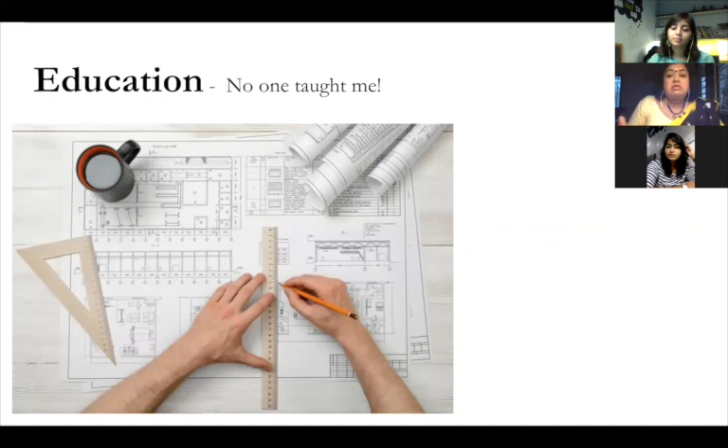One reason is education. Like one of you shared during the networking, nobody taught us. We are supposed to do things related to sustainability in college - maybe an assignment, possibly some detailing, maybe some material we've read in different places - but there is nobody who teaches us why, what it is, and how to go about it.

The second is the perception we have of the kacha and the pakka house, created by the community. If you are economically and socially poor, you will live in a mud house with a thatched roof - that's a kacha house - and then there's a pakka house. This was also shaped by the story of the three pigs and the wolf - if there was a straw house, the wolf could blow it down, if there was a wooden house, he could burn it. Something built with alternative materials could be destroyed, but a brick and mortar building stands. That changed how we started looking at construction, and it influenced young brains.

And then, of course, the media and the corporations have played a huge, long-standing role.

Everything that is, you have all these Ambuja cement ads showing one muscled man, and steel rods advertised behind buses and on large placards. You believe that's the only thing that's really strong, and anything else is weak. In spite of centuries of construction techniques that had nothing to do with cement or steel, our belief now, thanks to media, is that nothing is stronger than a pillar, or what people call a column. This is deliberate ignorance created by media so people don't approach anything else but materials that are great for corporations themselves.

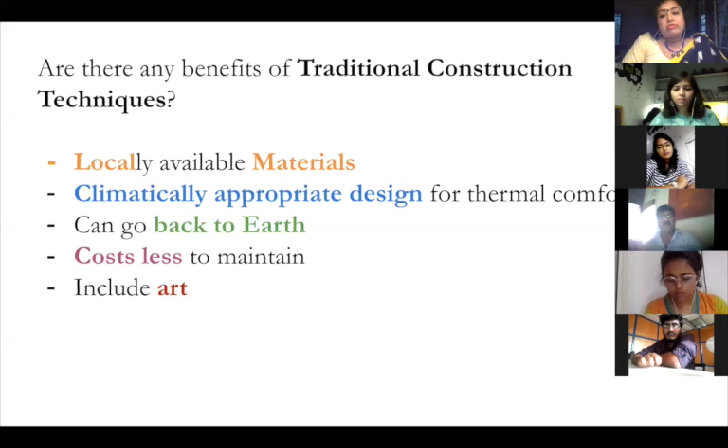So one thing we know for sure, that as artists and architects and designers, we are already artistic, so we already have the art bit of it. But it's the other references that somewhere we're missing that we might want to tie back in. And sustainability is this conversation and understanding of how to sustain a practice in building shelters. Very simple.

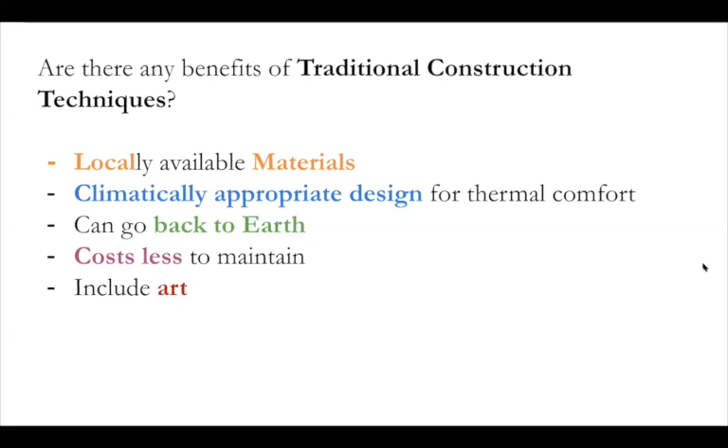So I'm going to revisit some of the slides from the previous workshop, so that for those of you who joined today for the first time - these are just a few of them.

One is that the architecture and construction industry together accounts for 36% of global energy use and 39% of energy-related carbon dioxide emissions that are annually affecting the climate today. That's a lot. And in India alone, the construction industry generates about 10 to 12 million tons of waste annually - that's a huge amount of waste that cannot go back to the environment in a way that allows the environment to be restored.

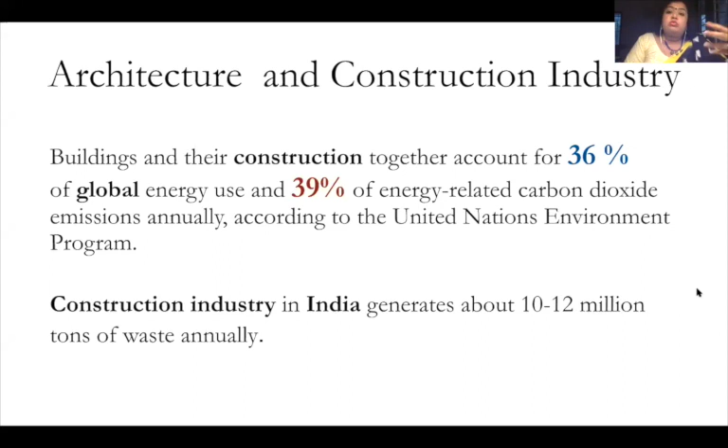There's a government, and in spite of that, the government of India says that the construction industry contributes to 9% of the GDP. And it employs 44 million workers, because of which we're the second largest employer as an industry in this country. It also helps people move up the skill ladder, to improve their income, to be able to have and avail more and better.

In a country with such a huge population, this is not an industry that can sit down and say, oh, we don't want to do this. This is where we become extremely responsible. It is our responsibility as leaders in this community to bring about this change in a way that people also benefit a whole lot.

So of course, there's a lot of necessity for innovations in the construction industry, and sustainable solutions are sought, and that is why you're here today, to learn about them.

To us, this is what sustainable design means, irrespective of the construction industry or not, whatever it is that you are doing, whatever it is that you're making, however it is that you live. This is a very simple thumb rule that you can go by. We've called it RALIS. I could have called it RAILS as well, but we've called it RALIS.

One is to rethink how much we need and why we really need it. Number two is real, genuine climate sensitiveness in understanding the climate, how it works, and how it affects the structures and vice versa.

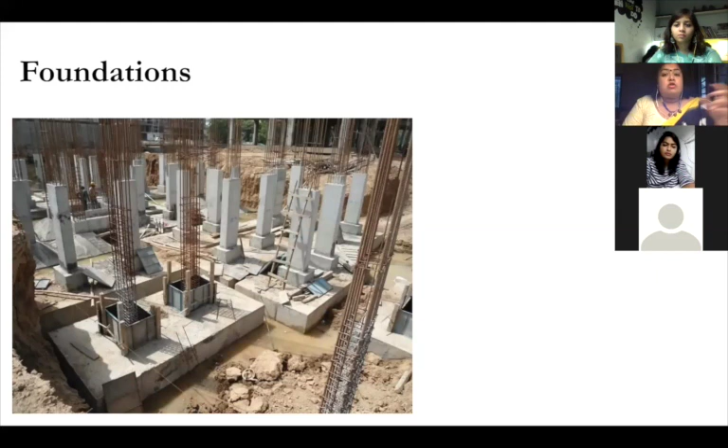When I came to South India, I discovered, because I'm otherwise from Gujarat, that you have these stone foundations, because stone is very easily locally available. So in South India, we do stone foundations and nothing stronger than that.

It's beautiful. This is again a very simple example of what you can do to have an alternative to just concrete, because steel and cement contribute to a huge amount of emissions to the environment, so they need to be re-looked at as materials for building.

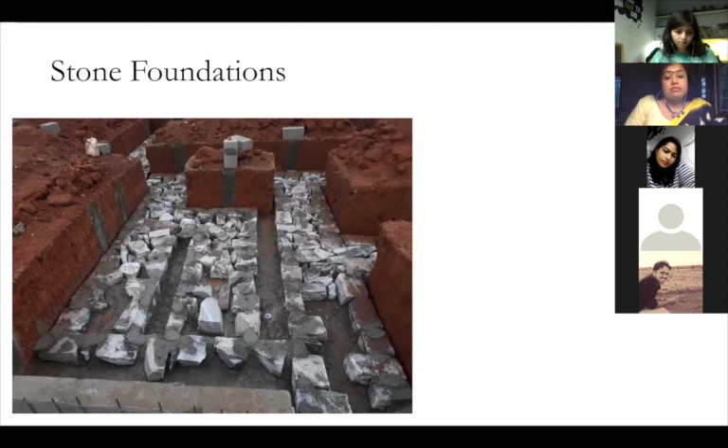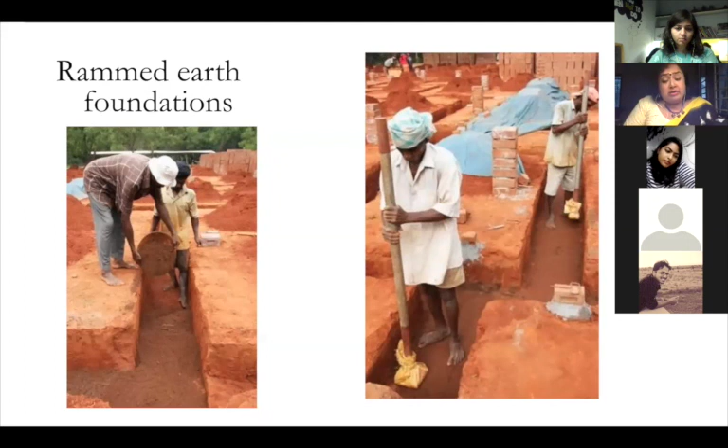You have rammed earth foundations. Very simple. Those of you who have been to Auroville have already got introduced to this idea. Very simply done. Used to be a big practice once upon a time, has got redundant over time, can be brought back. The arch foundations, right?

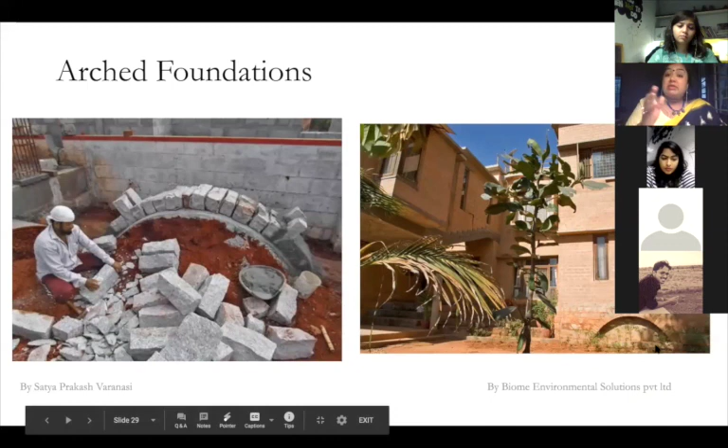This is a beautiful arch foundation example by Satyaprakash Varanasi's office, and this one from Chitra Vishwanath's office Biome Environmental Solutions Private Limited. This is a great way to reduce the amount of material that goes into making the foundation as well. Because stone is already a material, but then how much do you want to use of it? How do you minimize the material? It takes a little different design thinking when you use this kind of technique, but there is still a possibility of it.

Fly ash bricks, doing load-bearing foundations with the kind of bricks that are available locally. In Pune and thereabouts, Deepak was asking this question. There are a lot of fly ash bricks available because Pune basically consumes thermal power, and because it consumes thermal power, fly ash being a byproduct that is generated out of it. They also have a lot of pharmaceutical industries, which have a lot of calcium carbonate based materials. You can combine this and make beautiful bricks, which utilizes the waste for foundations.

There's another technique called soling, and you can do soling over soft soil. There are thousands of techniques, and I do not know where to even begin or end. So I've only touched upon some basics that I have been introduced to, that I have experienced and executed myself.

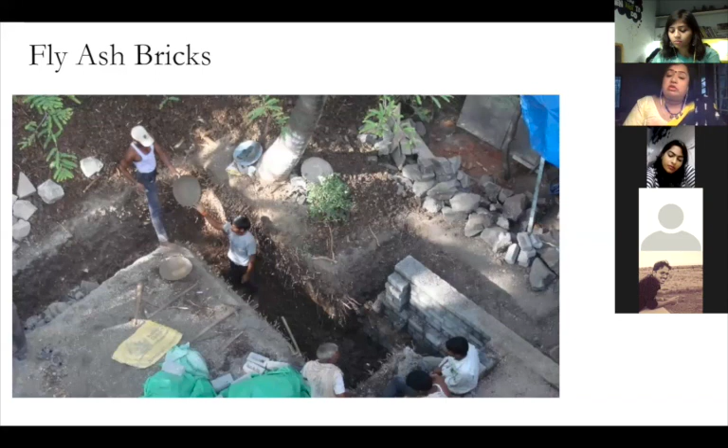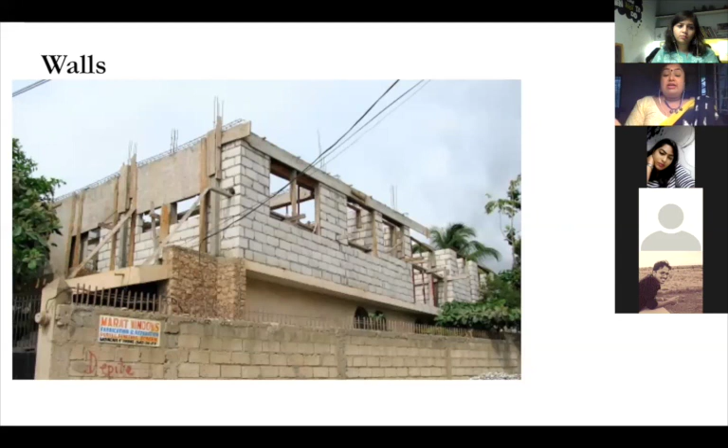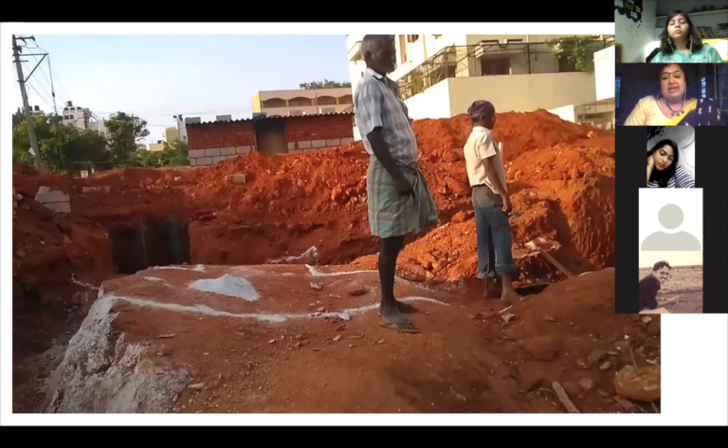What you do with this beautiful soil that you excavate anyway, you can make these SMB blocks, these stabilized mud blocks with them. This is the technique that the scientists of Karnataka in the Mysore region came up with, and it has been so popular in the past couple of decades or more. It needs a specific kind of soil structure, a very sandy soil, and it becomes easy to do in the Bangalore region because the soil here is naturally very sandy in nature.

What is a beautiful part of doing alternative construction techniques is also this, that it automatically makes you very sensitive to what is in the environment. Automatically.

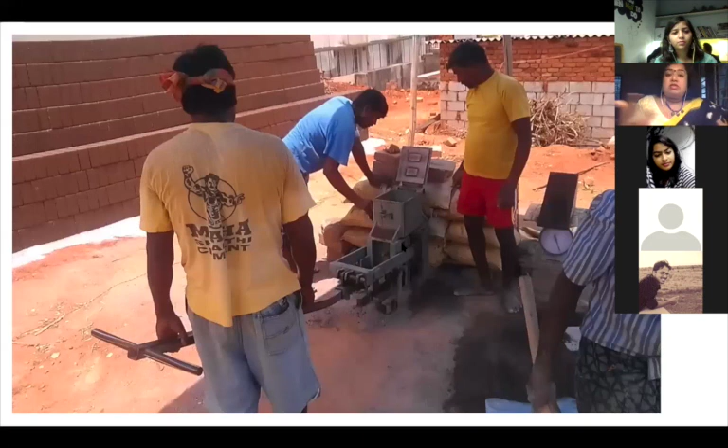We also call them mud blocks, stabilized mud blocks, CSEB blocks. There are several names given to them, but at the end of the day, they're made with soil, made with mud. And it's very easy to make them.

You'll end up seeing, I'm sorry.

And that's what the walls end up looking and being like. It's very easy to incorporate this back into the system, because the workers, the laborers, for at least a couple of generations have already got used to the old technology, the old techniques of building walls or construction. So it's very easy for them to move from regular bricks or regular materials to the mud block, and it's an easier transition. You will see that more of us are using these mud blocks because it is very easy for the laborers to handle them as well.

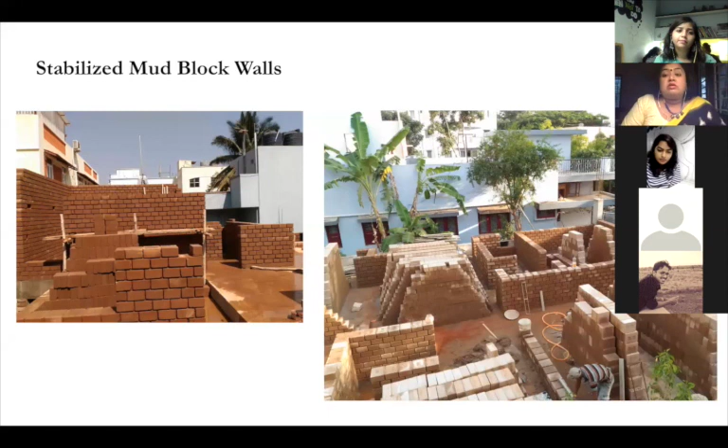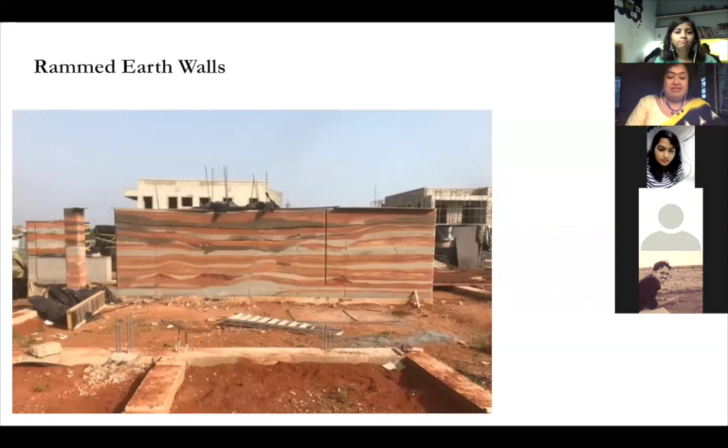And then there is rammed earth, of course, and you can do beautiful things with rammed earth. How amazing that it ends up looking as well, and it can be sculptural by itself. There's a site where you just need two pieces of planks or shuttering, just like you need for concrete, and you can ram the earth into place.

This is a mix of earth, mix of soil, and there's a little—in Bangalore, we use a lot of dust. You can also use sand and a small proportion of cement or lime to give it some sort of stability. It kind of acts like concrete, so it makes it very easy and very stable.

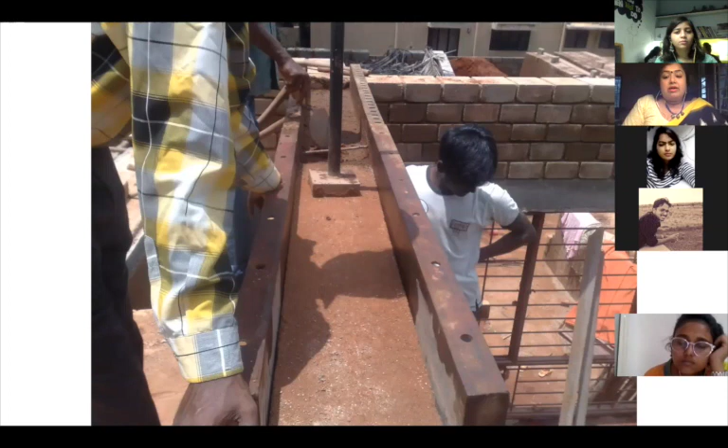In fact, they end up being pretty strong. It's very difficult to break or cut into these walls. Most of the electricians who have to cut into them for conduiting will complain. It is easier to cut into your regular bricks. The strength of these mud blocks is far higher than your regular red bricks that you manufacture, red table mold bricks that we talk about.

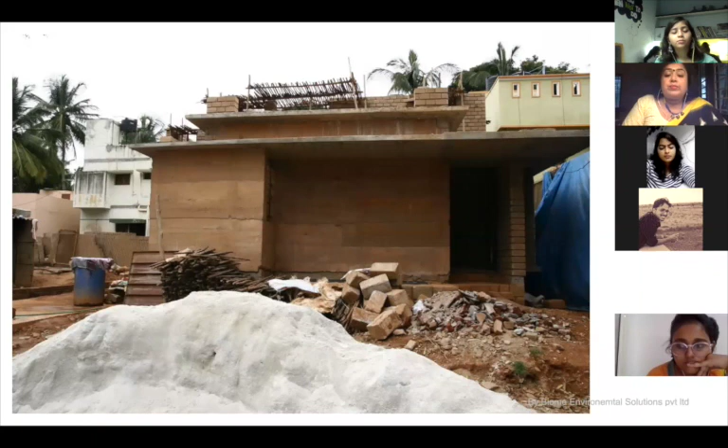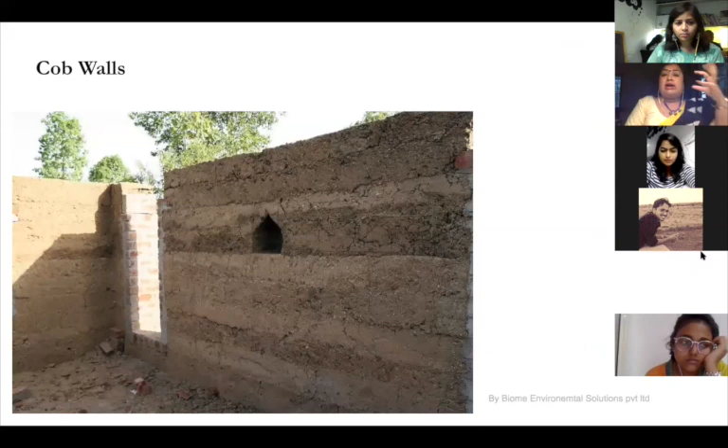And then there's cob walls. Cob wall is one of the most ancient techniques in most of the region of Central Asia, Central India. This is a very clay soil that allows you to work and mold the soil a lot. You add a little gravel, you add a little straw to it, and that makes it very malleable. Give it a little mold if you wish to, or just use your hands to give it a shape, and you can create very beautiful sculptural structures out of it. Traditionally, there have been 2-3 story buildings also created with cob, so you don't have to really limit yourself.

In this case, this is a cob flooring.

And then there is adobe bricks. Adobe bricks, again, these are not necessarily your mud blocks. The mud blocks are compressed in nature, compressed to give them a certain kind of density that makes them very strong. But these adobe bricks were a traditional method of doing it. I'm sorry if the rain is disturbing, it is pouring right now.

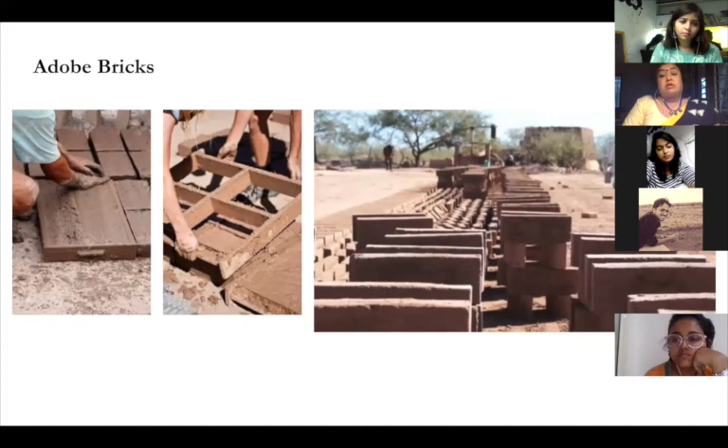The adobe bricks bring in a little straw, again a little gravel, just like cob. It works like how cob works, but you give them into small parts, because it's very easy for you to work with them. This technique is, again, very highly used in the central part of our country, and in Africa as well.

Very easy. In the east region of the country, you will see this technique of wattle and daub, as we call it. There's a lot of bamboo that's very easily available. Because it is raining so much, the walls need to breathe a lot. It needs to keep the walls aerated so that it reduces the amount of humidity and makes it easier to breathe. The wattle and daub is a superb technique to get that working for you. It's a very innovative style that a lot of architects have been able to incorporate as well. So if you're working in the east of the country, where the materials are easily available and there is less termite infestation, it is very easy to use these techniques.

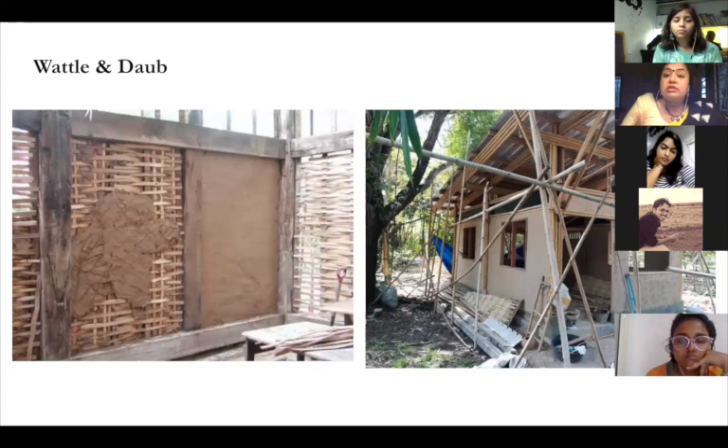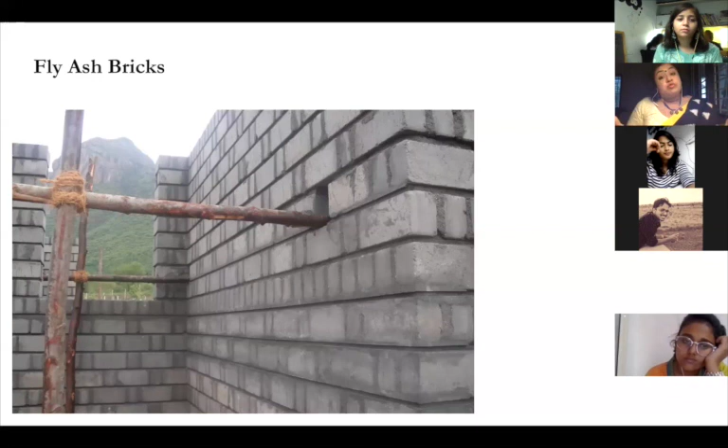And then, like I mentioned earlier, there is fly ash bricks. These are manufactured in parts of the country where you have thermal power stations. If you have thermal power stations and a lot of fly ash, it makes common sense to make a brick out of it, because otherwise that carbon left in the environment is very difficult, very difficult on the respiratory systems of human beings. So what you can do is build buildings with it, because that is our way of paying back our debt to the environment. They're absorbing that material.

In a technique called rat trap bond, also famously known as RTB, you use a lot less material—only two-thirds of the material. You save a lot more material, allow for the walls to also be insulated in the process, and the buildings can look very nice. You don't necessarily have to do something else on it.

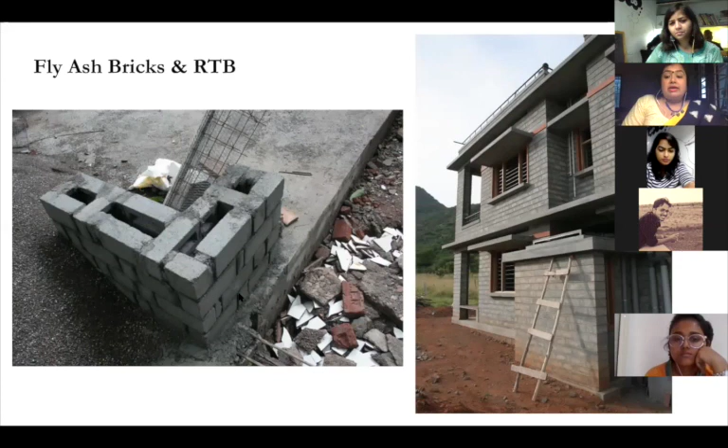In case you're even having to use your regular table mold brick, the reason we are not really encouraging the use of table mold brick is only for one reason. Especially where we are in this Karnataka region, farm owners sell their farmland because it is highly poisoned with chemicals and pesticides that are corporation fed, and the soil is not generating anymore. These non-generative lands are sold away to brick making factories, or rented out to them, so that they can make bricks with the soil. The top soil, which otherwise has a good amount of what we call organic matter that allows food to grow, is only the first 9 to 10 or 12 inches of soil. That is already taken away, and then the bricks are made with them.

The bricks are burnt, and all the organic matter is burnt out too. The bricks are not of great quality because the soil here is not very clean in nature. So why even use it? But if you do have to use it, rat trap bond is a great technique because it helps minimize material. It depends on where, because if your houses are in close proximity, you don't want to use that, because just as air is a great insulator of heat, it is also a great conductor of noise. So you want to be sensitive about that.

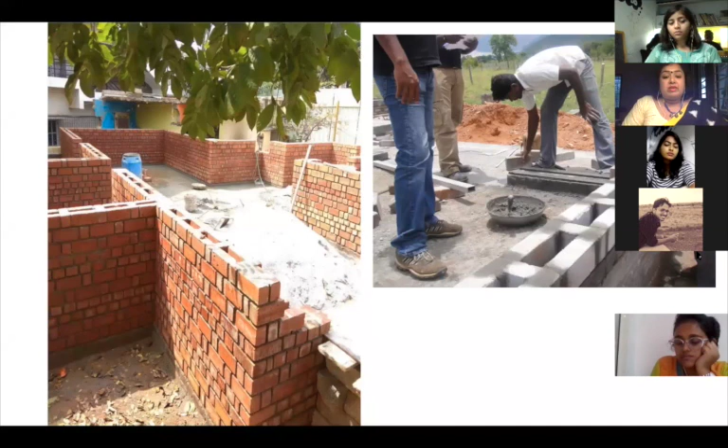And that's what our rat trap bond house, that we have, Maitri Shankar would relate to. It is her neighbor, and this is what it can end up looking like.

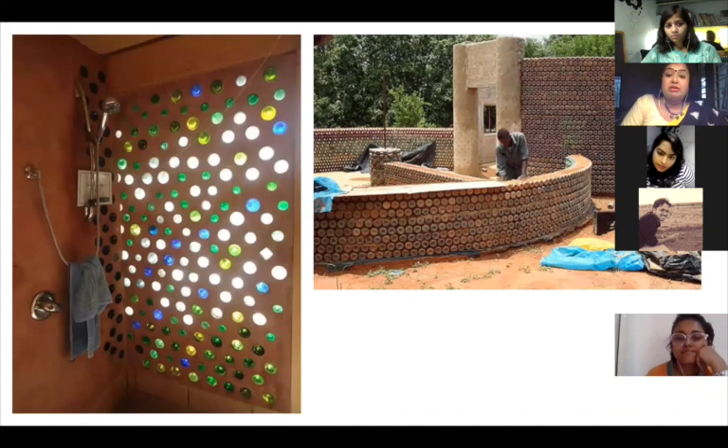And then there are bottle walls. There's so much waste out there, especially bottles, because we're partying so much. There are all these bottles, and you can create bottle walls and bring a lot of drama and fun with them. It's so exciting to see light coming through in such a magical way. There are regions in Maharashtra where plastic water bottles are stuffed with earth or other waste material and used for building, and it's beautifully done.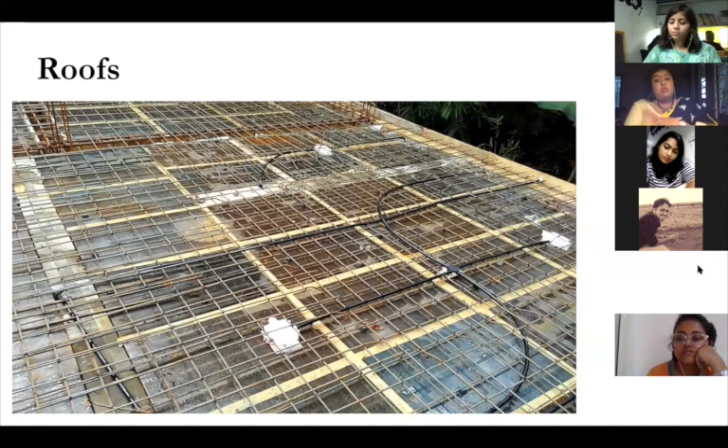So the question is, do we really need all of this? Is this how it's meant to be? Is there another way? We'd like to show you the different kinds of roofs you can really play with. There's, of course, the filler slab.

The filler slab allows you to halve the amount of steel, and also brings in insulation because the material is hollow. The hourdi, a tile manufactured in this part of the country, in Kerala and Karnataka, is a beautiful invention that allows you to do a filler slab very conveniently. In other parts of the country, I've found it's not always an available material, so you can always use another alternative.

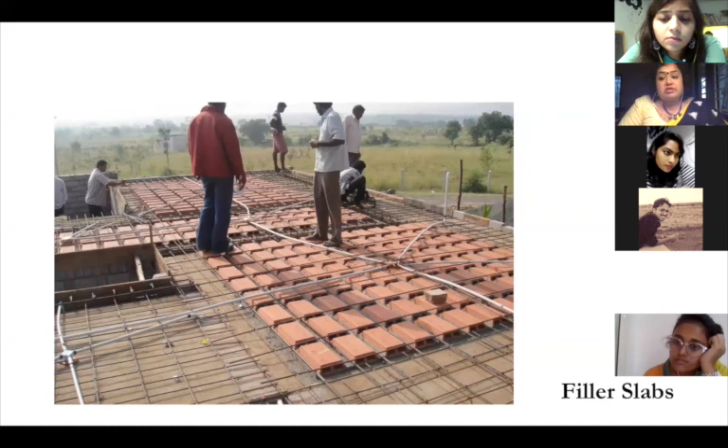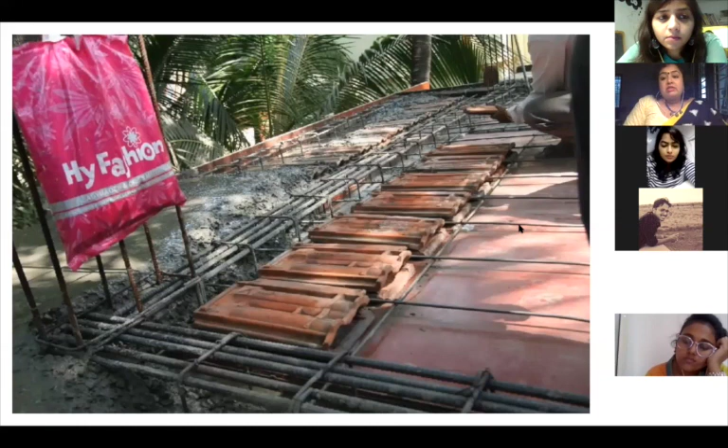I'd like to show you what. In the buildings we did in Pune, we went to our neighbors and found they had all these Mangalore tiles that were wasted and they didn't want to use anymore, because they had a sloped roof, but these tiles were not the new standard size, and the old ones were not usable anymore. So sandwiching them and using them, a technique developed by Laurie Baker years ago, is a beautiful system to minimize the amount of concrete and steel, and is another way to do a filler slab. You can bring design and variation into it.

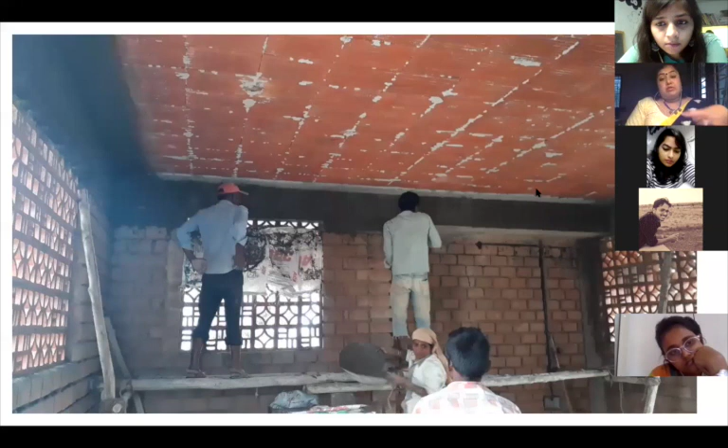And that's how it could look from the bottom. There's something new, something different. The finished version ends up looking and feeling like that. You can, of course, paint it to a color you wish, but you can also leave it naturally the way it is.

Bringing terracotta material into it, there are so many architects doing fabulous work right now, playing with these materials and creating some magic with them. You can bring in waste tiles and incorporate all of that to again help minimize the amount of steel and concrete that goes into a slab.

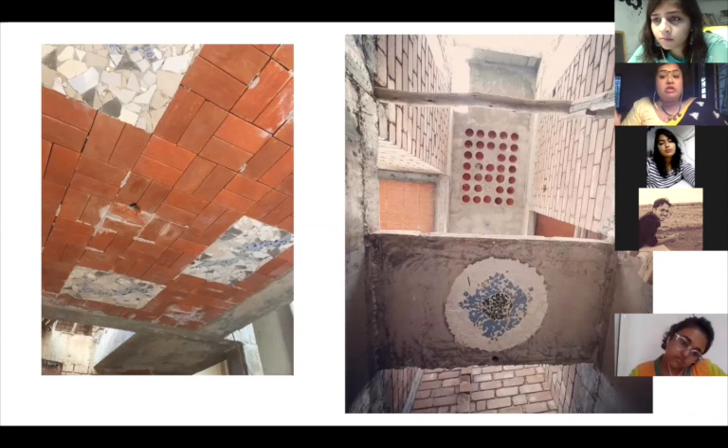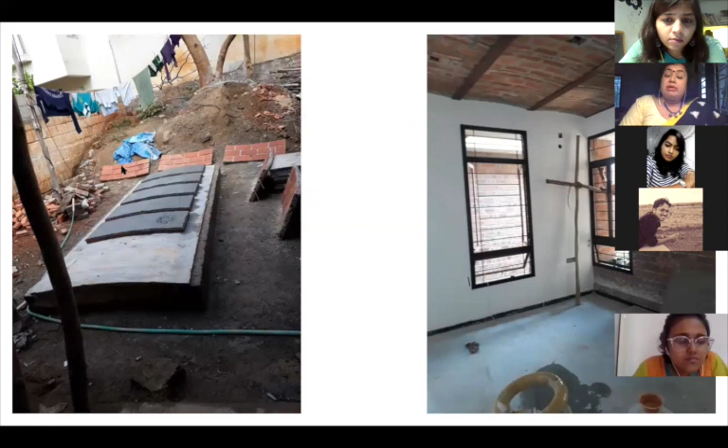And talking of minimizing, there's the arch and flat panel system, also highly professed at Auroville. These are panels made with the waterproofing tiles you would otherwise use for the roof. These tiles can be made into panels used either as a flat panel, placed next to each other, just 1.5 inches thick, or made into a semi-arch at site, and then placed on top of ribbed beams, either a concrete precast beam or a steel beam. It has a slightly different aesthetic.

So this is the arch panel, but we had jack arch roofing in the older days. The arch panel is an innovation derived from jack arch roofing.

Of course, there are domes and vaults that you can do, and mud blocks make it very easy. There are several materials you can play with, but you can also play with shapes. Like you remember from physics class, everything circular is a very stable form.

It does not require any steel reinforcement or concrete and can very conveniently be utilized using a very simple method. For the vault you just need one little scaffolding, and for the dome it's just laying the bricks in a circular pattern, layer by layer. That's it. They allow you to have a lot more volume, allowing for cooling and increasing the thermal comfort within the space.

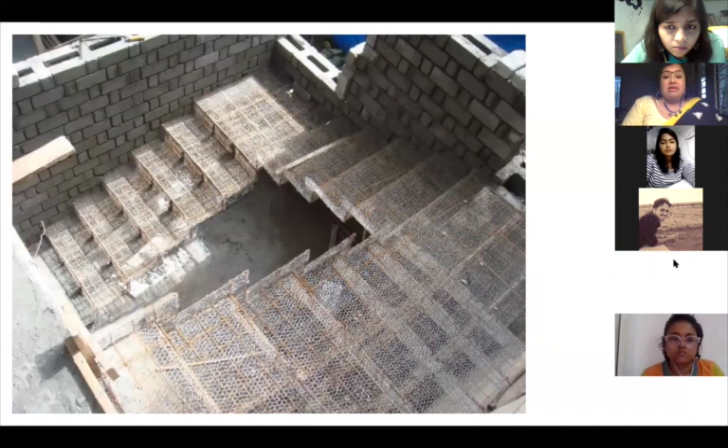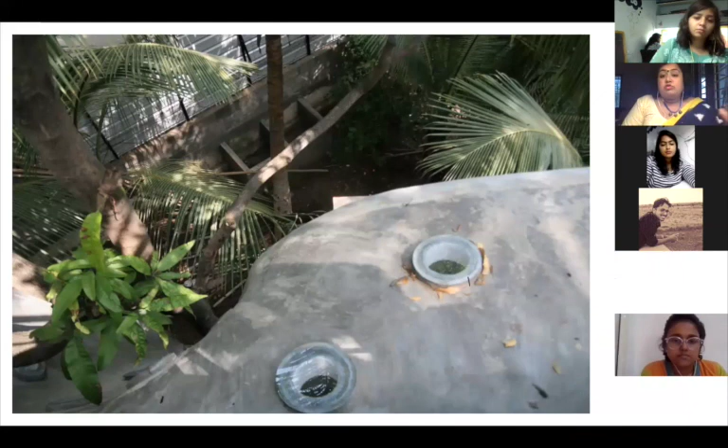And there's of course ferrocement, which can be used for staircases, for walls, in several different innovative ways. In this house in Pune, we had a mango tree that we did not want to cut, so we wanted a wall that followed the shape of the mango tree without interrupting its growth. That's how the wall turned out, using ferrocement, and you can bring innovation, design and style into that.

Waste is the next aspect. In the traditional homes we saw, art was incorporated using all the materials that were locally available. In Kutch, there are colored rocks available in the vicinity of the region, and they use those colored powders to make little drawings on the walls of their houses, along with the dung of mules and donkeys they raise, also used to create artwork.

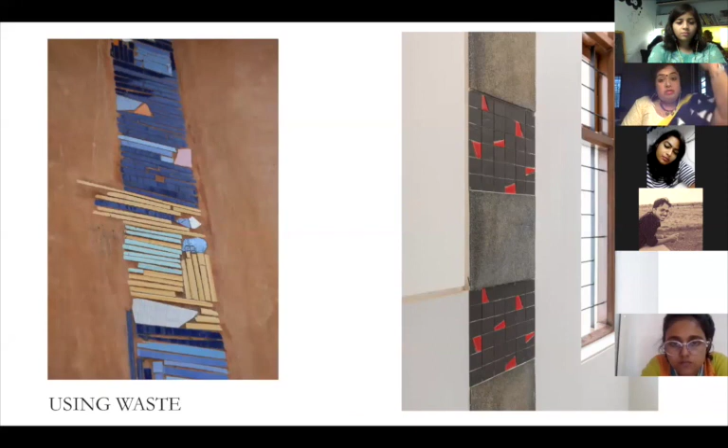They can become pavers, produced by this eco-social, Swachh eco-social NGO. And yes, keyboards sandwiched with thermocol. Thermocol, again, is a waste material that's very difficult to put back into the environment - it doesn't have another purpose to serve, and it doesn't decompose at all.

And it is a great insulation material. So collecting that and sandwiching it with a keyboard that also doesn't have another purpose to serve is a great way to ensure we minimize waste. In this school's case, we had one kabadiwala right next door who had all this stuff, and we wanted to use it up.

The last aspect is, of course, the finishes, because a lot of us are very aesthetic people - in fact, all of us are - and we want things to be beautiful. There's nothing wrong with that, because nature made everything beautiful, and as designers and creators, it is our responsibility to create beautiful things.

Finish has become a concern because a lot of us are very fascinated by everything imported from another world. But the reality is that our country itself has some beautiful finishes available - from Athangudi handmade tiles, to hand-done oxide floors of various colors, to mud plasters with so many different techniques, to very beautiful Indian stones. Every single stone is an Indian stone available in our country; you don't have to source it outside of our country, you don't have to import anything.

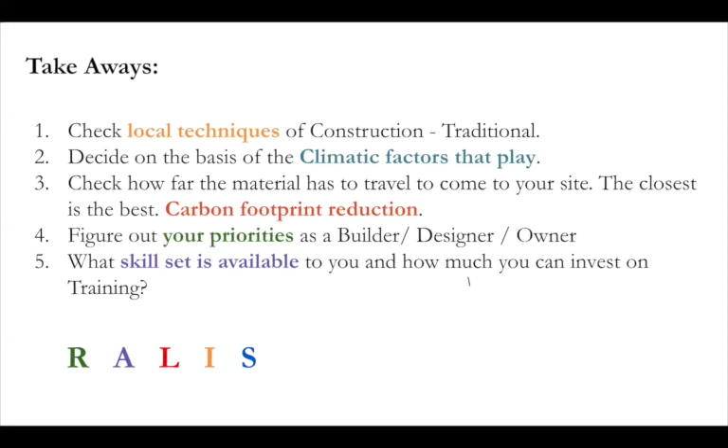And then, of course, the climate factor plays in. Like I quoted you the example of what happens in Kutch and what happens in Ladakh, and how the approach to design of a traditional building is shaped by the climate, and how climate decides what is to be done and not. You also need to look at it.

Like if you were building a house in Mangalore or somewhere in the coastal region, or if I was working in a place like Mumbai, then I would look at using laterite, because laterite stone breathes and allows the walls to ventilate. That is extremely important when you're looking at hot and humid climate, and how you can bring thermal comfort with it. So climate is going to start teaching and guiding you, and it's a very quick learning you will get from the traditions that are already ongoing or have already been used before.

Fourth, figure out your priorities as a builder, designer, or owner, because that will have to be the case. Okay, I want to please my client - that's a possible priority. There's nothing wrong with that. You could also decide your priorities: I want to look at only the climate, I want to only look at the finishes, I want to only look at this - because it's all right to take one step at a time. You don't have to feel very guilty if you're not doing everything perfectly. You can just take one little step at a time, choose that one little change you will bring into your next project, and then slowly, gradually make it larger and larger as it goes.

And then the fifth thing is you look at the skill set that is available to you. It is going to play a big role. I want to use a cob technique, but I don't have the skill set of laborers willing to do it - it is not going to happen. You have to also have the bandwidth and the monetary fund to be able to educate and train these laborers, if at all. So looking at the skill set and the willingness of what is available right around you is also going to play a very big role.

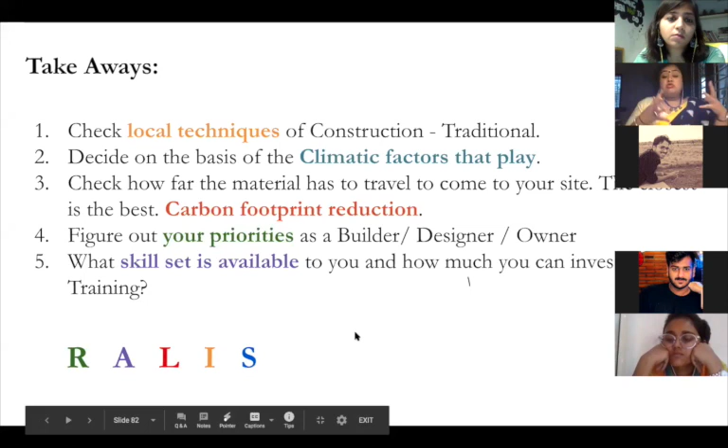And besides that, of course, you want to look at all this. You want to rethink everything. You want to look at everything from a local aspect, look at it from a sensitive perspective of the climate, of the local, and also get informed from what the traditions already have been.

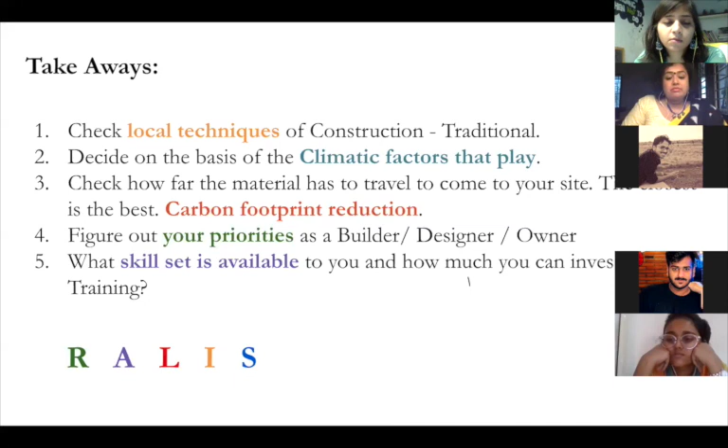I'd like to end this by saying that I cannot do all the good that the world needs, but the world needs all the good that I can do. So if you are willing to do that little good, that can be a beginning in this movement towards sustainability.